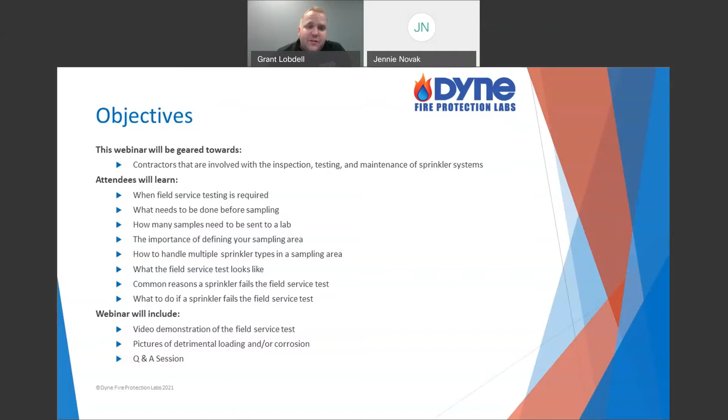As you signed up, you've seen the objectives. Really, this webinar is going to be geared toward contractors that are involved in the ITM, the inspection, testing, and maintenance of sprinkler systems. Specifically today, we're going to be talking about the field service test. Kind of when is it due, how many do I need to send in, what am I testing, what does the testing look like, what do I get back. So kind of a broad overview of the whole field service test. As Jennie mentioned, there'll certainly be a Q&A, you can type those in at any time. I won't stop my presentation to answer those until the very end, but feel free at any point to put them in there. There'll also be some videos and some pictures for you guys to look at.

Before I get going, I will be referring to NFPA 25, and I'm going to refer to my 2020 edition. That is the current one right now. I realize many states are behind, depends which state you're at, which one is adopted currently. But whenever I talk about NFPA 25, I am going to be referring to the current 2020 edition. The next edition is actually in draft 2 currently, so they are already well underway on the second draft of the next edition.

There'll be a few times I'll comment on, hey, this might be coming up in the next edition as well. But before I get going, I always do this disclaimer: this webinar shall not be considered the official position of NFPA or any of its committees, and shall not be considered to be nor relied upon as a formal interpretation. So this is my opinion of it. If you would like a formal interpretation, you can certainly go to nfpa.org and request one.

So now that we got that out of the way, let's jump right in. Starting off with a pretty obvious statement that sprinkler performance will degrade over time.

We're taking a metal object or a device and putting it out in the elements. It's going to degrade over time. How fast it degrades depends on a couple factors, and I've highlighted here the environment. If I'm in an environment with high moisture content, or harsh chemical vapors, cleaning agents, things like that, something that'll accelerate the corrosion, it's going to degrade quicker.

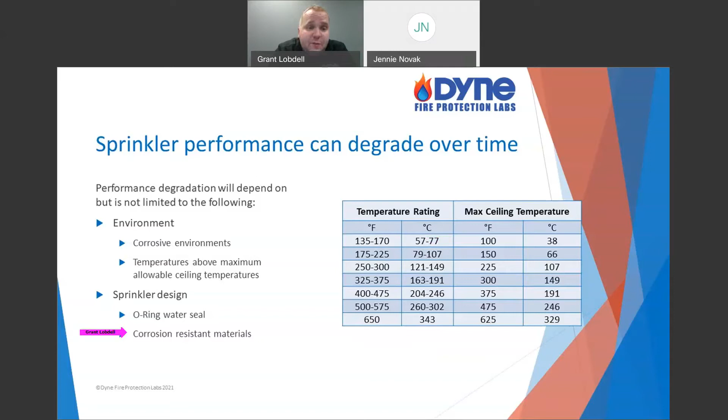But we can go the opposite direction as well. Let's say I am in a harsh corrosive environment and my sprinkler is going to degrade quicker. There are designs, there are corrosion-resistant materials and coatings you can purchase on your sprinkler to increase its lifespan in such environments. So we can go either direction on this.

So it's pretty obvious, sprinklers at some point are going to need to be replaced. Again, we're taking a metal object, putting it out in the elements. No matter what, we got a car, we got a high-rise building, at some point it's going to fail, at some point it's going to degrade. So NFPA has outlined in NFPA 25 when that replacement is to occur.

Really it breaks down, what I like to think of it as, is we're first going to identify, well, is my environment considered harsh or not? And I get a lot of questions all the time about, well, what is a harsh environment?

In the annex, the explanatory material, not in the actual enforceable code itself, but in the explanatory material, they list several environments. We have paper mills, packing houses, tanneries, alkali plants. They list several examples, but that's not all inclusive. I mean, anywhere where I could have corrosive vapors could be a problem.

We've had this argument at the committee meetings before. Water's corrosive, I mean, water vapors, that's corrosive. I think ultimately what it comes down to is if I'm outside, my typical, what I could expect for humidity, Minnesota here right now in the cold winter, we don't have that humid, but in the summers we can get up there. Once we start exceeding, if we're talking like an environment where maybe I got a swimming pool or something like that, that's probably a corrosive environment.

But how you can be sure is you contact the manufacturer of the sprinkler. Tell them what you got, here's what I got. They're going to look at the material it's made of, and they should be able to tell you, hey, do I think I have a corrosive environment or not?

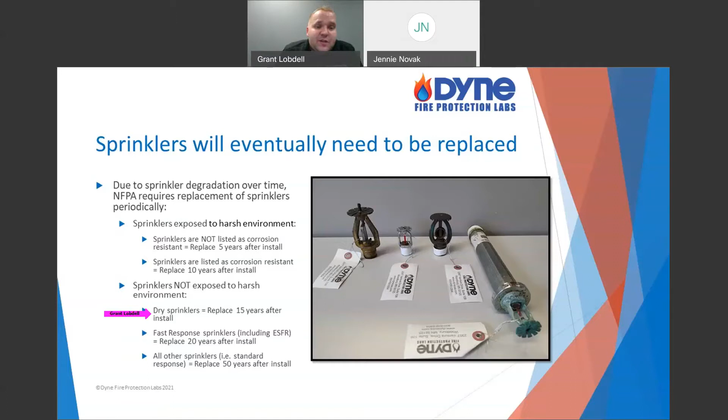So I've talked a lot about replacement, and many of you are probably thinking, boy, that's going to get costly—and that's what NFPA is thinking too. We've got to replace these all the time. Well, for good news, in lieu of replacement, you can test instead.

And this is what many people choose to do. It can help keep potential replacement costs low, and what we're going to do is confirm that this sprinkler is still maintaining its performance and hasn't degraded to an unacceptable level, and can remain in service. But realize we're going to have subsequent testing after that.

So come 50 years, let's say the picture shown is a standard response sprinkler. 50 years, it comes time to replace, you're like, you know what, I'm going to test instead of replace. Testing shows, yep, this sprinkler is still performing just fine, can remain in service. But it doesn't mean you get to go another 50 years.

If you test it, in this case it could be 10 years. If I have a harsh environment, it's going to be every 5 years. Then I'm going to keep testing it every 10 or every 5 years to make sure it continues to maintain. At some point, it's going to fail, and that's when it would trigger, okay, now I need to replace them all.

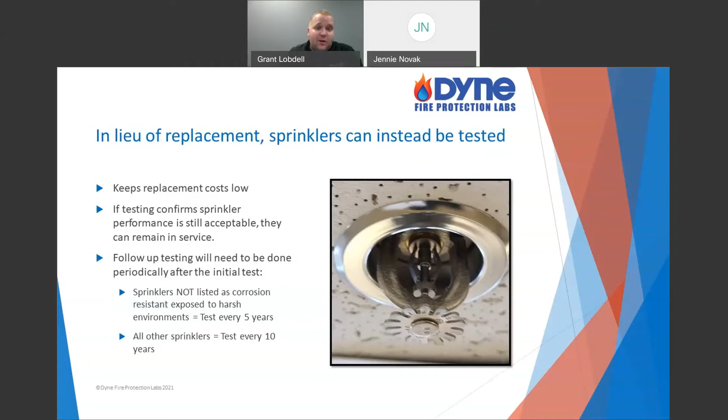So when it comes time for sampling for testing, and this is a misconception we run into a few times, we're not testing every sprinkler in your building, your area, your floor, whatever it is. As soon as you remove that sprinkler from service, you're not allowed to put it back in service. Once you unscrew it, you can't put it back up.

Two, the testing I do is destructive. So when I go and test this and ensure, yep, it released at this time, I can't reassemble it. The solder is melted, the glass is broken, whatever we got going on, it's a destructive test.

So what you're actually sampling when it comes time to testing is just 4 or 1%, whichever is greater. So in a building like this, I have less than probably 100 sprinklers. I'm going to have to send in 4. 1% is only 1 out of 100, so 4 is my minimum. But realize I've been saying at least 4 or minimum of 4 or 1%, whichever is greater.

You may have to send more. We want to make sure every sprinkler in my area is represented. If my building, when it was built, we put in the same sprinkler throughout the warehouse, everywhere, it's the exact same sprinkler, okay, 4 or 1%, choose them randomly, send them in for testing.

But let's say maybe I did an addition at some point, and I have a different sprinkler there, or maybe a different temperature rating, maybe in my laboratory a different manufacturer or temperature rating, things of that nature. I'm going to want to make sure I at least get one of those in there to represent it.

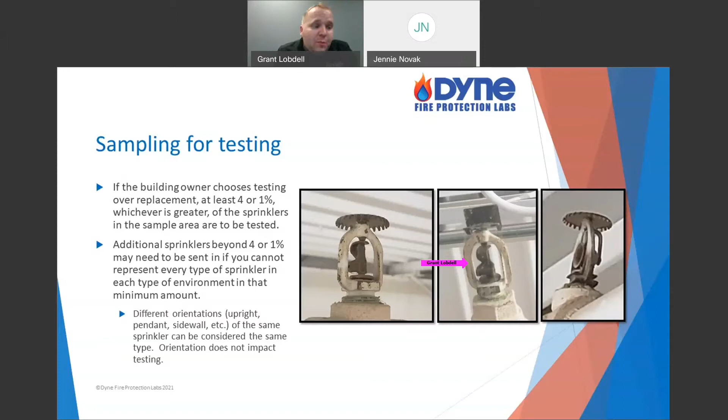So I'm going to send in 4 or 1%, could be more. I want to make sure I get everything represented in my sample. And 4 or 1% of what? Am I doing that by system, by riser, by floor, by building, by room? NFPA 25 does not tell you what your sample area needs to be, and this is on purpose.

They want the building owner or the designated representative, if you're a contractor out there listening, yourself, to define this. What is your sample area going to be? Again, just referencing the building I'm in here, I have an office and a warehouse, maybe 100 sprinklers. I certainly can say, yep, I'm going to consider this all one big sample area. I'll take 2 for my office area, maybe 2 for my warehouse, and that's going to be my 4 or 1%, assuming I only have a couple different types of sprinklers in my area.

Or I could consider the office one sample area by itself, send 4 from here, and take my warehouse and send 4 from there. Now, why would you do that? Well, the reason you want to break up these sample areas at times is you can have one failure, even just one, and you're expected to replace every sprinkler that that sample area represents.

So again, take my warehouse. Let's say it's more likely to fail, just being a warehouse, not as conditioned as the office. If I sampled my whole building here at Dyne and sent in 4, and it represented, I took 2 from the warehouse, 2 from my office, sent them in. I had one failure out in the warehouse. Now I have to replace everything at Dyne, because I consider that my one sample.

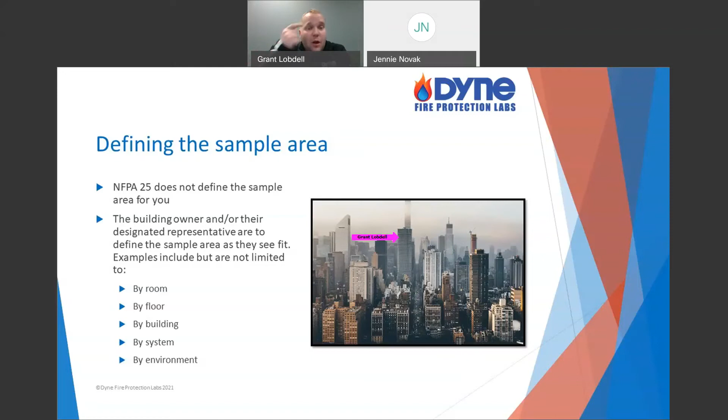Okay, well, I have to send in 4 from every floor. That's a lot to send in for testing. Well, is it worth it? You got to see how many are on the floor. How many would I have to send in versus how many would I potentially have to replace?

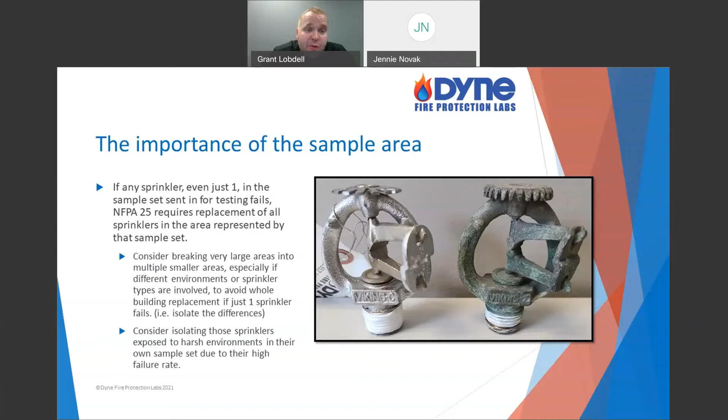So like I said, NFPA 25 does not define the sample area for you. I'm not here to tell you, yeah, you should do it by system, you should do it by floor. That is up to the building owner, or if you are their designated representative, up to yourself in that regard. So definitely it's very important that you define it. However you define it is up to you, but it does need to be defined.

So when it comes time, let's say the building owner or the contractor, the designated representative, has decided, okay, I got a lot of sprinklers here, I don't want to replace every single one, that cost is a lot, I'd rather just send in 4 or 1%. That seems more reasonable. And they've decided, yeah, I'm probably going to break out my warehouse and break out my office into 2 sample areas. Okay, they've gotten that far.

But now comes time to actually take down samples to test. You've realized, okay, I got 2 different types, I want to get 2 of each of those. Now, where do I take them? It should be random, all right? It shouldn't be just because, well, I don't have the ones by the front door, I don't have to go in very far, I can get a ladder easily in there, I'll just take those ones. It really shouldn't be. It should be at random.

Obviously, if you have different environments, like I said, you want to make sure you get those representative. So if you took Dyne and I represented it all as one area, including the warehouse, I can't just take 4 from the office and call it good. If my warehouse is a different environment and it's in my sample, I should get at least 1 in there in that sample. All right, so we want to make sure everything's representative. So again, we're choosing them at random.

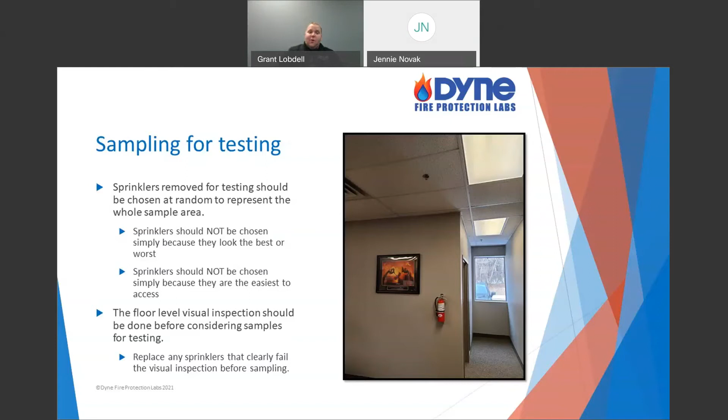And we should do this before we're testing. So I'm going to come in, okay, they want me to test, we've decided this is my area, I'm going to test. Before I actually take down those sprinklers, I'm going to do that annual floor level inspection that I do. I'm going to do that before I consider anything for testing. So I'm going to replace anything that has leakage, corrosion detrimental to performance, physical damage, loss of fluid in the glass bulb, loading that's detrimental, or paint other than that applied by the manufacturer.

I'm going to go through pictures of each of these and why it's important. But I'm going to go through and replace any of those, and what's left, that's what I'm going to sample from.

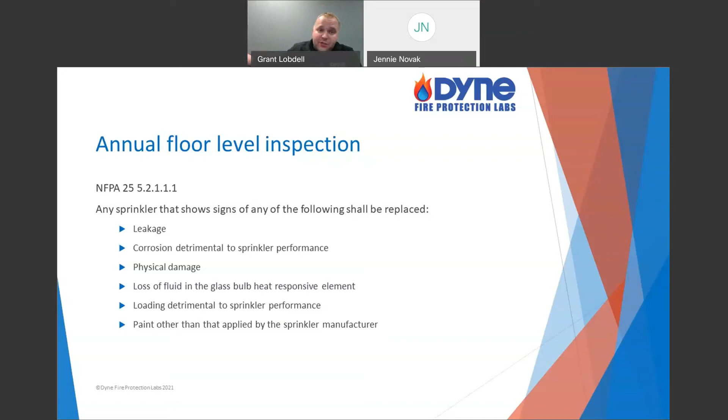So let's go into a little bit of this floor level inspection and what I should replace. I shouldn't even consider these for testing.

So leakage, that was one of them. We're going to have water damage with leakage. If you're unfortunate enough to come to a puddle or water streaming out, obviously that's leakage. But a lot of times, leakage will just be represented by corrosion around the water seal. This would be, you know, this upright sprinkler here. You can see a lot of corrosion around that water seal area. So what's happening there is water is just slowly leaking out and probably evaporating before there's a puddle on the floor before you even notice.

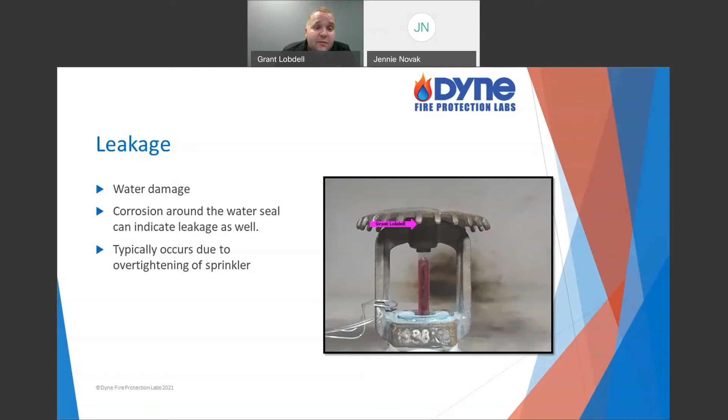But that water getting on there, I have a high moisture content, I have oxygen in the air, and I have metal, so I'm getting corrosion. A lot of times we'll see issues like this. If it was a pendant sprinkler, a lot of times I might also see if there is some water seeping down, some corrosion building up around the deflector there. So if I have very isolated corrosion like this, it could be an instance where I have leakage.

Again, why does it leak around there? A lot of people are quick to say the manufacturer didn't seal it correctly. From my experience, that's pretty rare. Typically when these leak, it's usually just over-tightening. A lot of these sprinklers, when you get a data sheet for them, they should have a torque rating on them, and that's as much torque as you should put on it. I'll have a damage picture for you later showing what happens when we over-torque them.

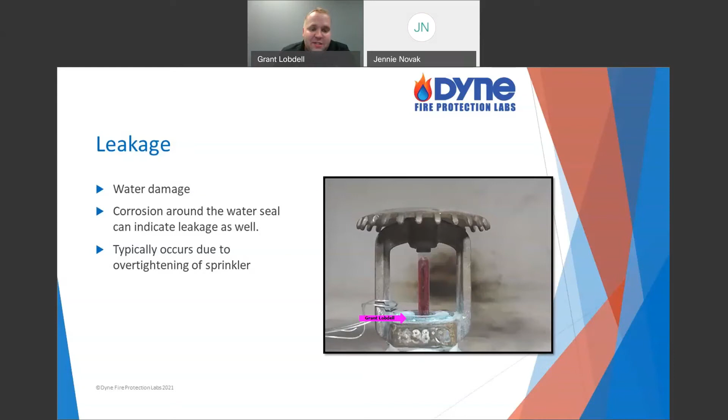So leakage, I see anything with leakage, I'm not even going to consider that for testing. Given this corrosion here, it would probably fail. But that clearly fails the visual inspection, I'd replace it.

So both corrosion and loading, two other things you're looking for in your visual inspection, they use the term detrimental to performance. We're allowing some corrosion and some loading, and we're only replacing when it gets to be detrimental. That can be a judgment call, and I've had a lot of questions about what is detrimental, what's not. Our website, I would refer you there, has a lot of pictures with examples: here was this sprinkler, here it had this corrosion, this was the response time, did it pass or fail?

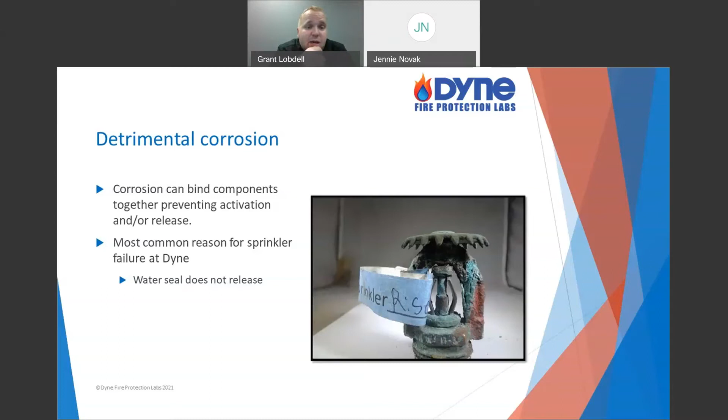We have a lot of examples out there, but even then, there is still somewhat of a judgment call. But why is corrosion detrimental, or when it's detrimental, why is it important we replace that? Well, obviously, corroded parts can weaken, or they can fuse together. That's typically what we see. The most common cause for a sprinkler failure, by far, is corrosion around that water seal, where the release mechanism may still activate, but the water seal is stuck on there. The corrosion is just holding it in place.

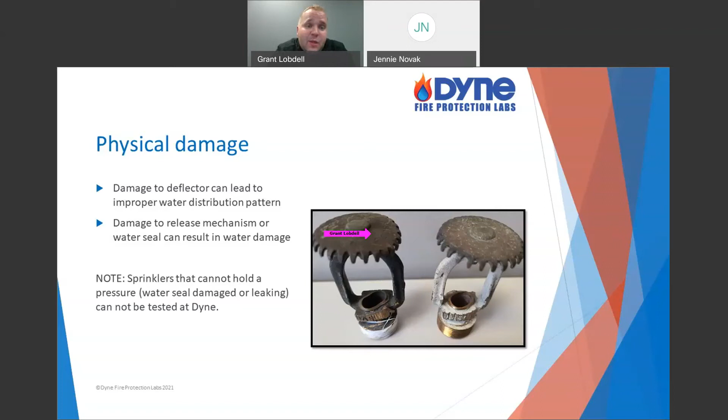It looks like there's no liquid in the bulb, but be very careful. There's instances, especially in direct sunlight if I have a lot of UV light, or if I'm in a freezer, where glass bulb sprinklers, the color, the dye inside them, can come out of solution, can change.

I can get a translucent looking bulb. Those ones in the freezer, usually if I take them out of the freezer and allow them to heat back up, the color comes back. They've shown that it's not detrimental to performance, just a loss of color, but obviously the loss of fluid is.

How can you tell? Well, a lot of these bulbs have a little air bubble, kind of like a level - you put a level on something, you've seen that air bubble move. If you can see the air bubble in it, well, you got the liquid. You could compare it to other ones as well. If that air bubble looks a lot bigger than the others, well, maybe you have lost some liquid, just not all of it yet.

The liquid - that's how a liquid bulb works. The liquid expands, pushes on the glass at a point, it breaks. So it expands into that little bubble until there's no bubble left, and then it just bursts. In this case, I don't have any liquid. Until that glass melts, that water seal is not coming out of there.

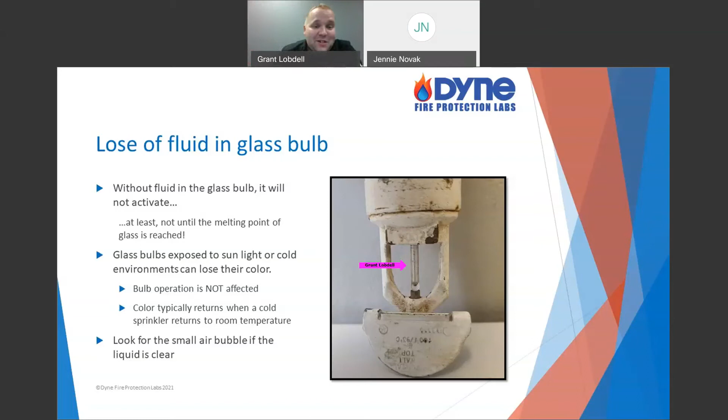The deflector is a little concerning. It looks like it's kind of built up on there. I might not get it. So do I need to replace this one? Well, you can. In lieu of replacement, you can actually use compressed air or a vacuum and clean that off, provided you don't touch any part of the sprinkler.

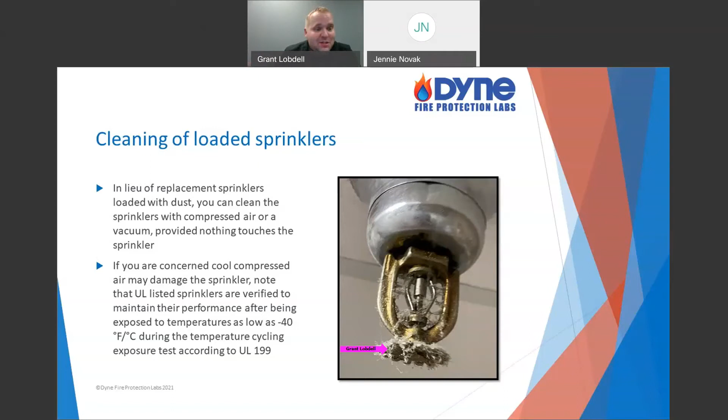So we shouldn't be too concerned about the degree of the compressed air. But still be very careful if you are choosing to go that route, that we don't damage the sprinkler. We don't want any water damage.

And non-manufacturer paint. So we're still talking about all the visual inspections, the floor level visual inspections. I'm not taking binoculars out, I'm on the floor just looking at it. Any non-manufacturer applied paint, I'm going to replace.

So we got this in the lab, we tested it, it didn't release, it fails. Now everything in the area has to be replaced. Had they seen this, maybe this is the only one that looked like this - had they just replaced it, not sent it, they wouldn't be in this situation. But we want to make sure we look for that and get them replaced.

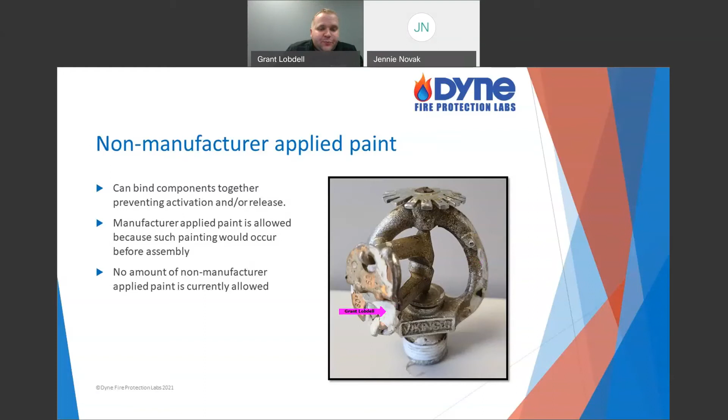So we've gone through, we've decided we are going to test instead of replace. We've gone through the math and figured out, yeah, we got a lot of sprinklers here. Testing is an option. Even though I got to test every 10 years, it's still going to cost - just testing is going to cost me a lot less than replacing everything.

I've defined my area, done my visual inspection, replaced everything that failed the visual inspection. I pulled my random 4, 1%, whichever is greater, maybe more if I have different types - I want them all represented in the area. So I got them all down, now I'm going to send them to the lab.

Worst thing you can do is just literally plop them in a box, a random box, and send them off, right? Especially if I have glass bulb sprinklers, they might rattle around, they might break. I want to make sure I get them packaged so they're not getting damaged on the way to the lab. I told you before, no matter what condition you send us in, we'll test, except for one thing - the damage. If the release mechanism is already activated, or I can't hold the pressure, the water seal got dislodged, I can't test it.

So we're going to make sure we take care to get them to the lab in good condition, or the condition you found them in, right? We don't want to be manipulating them, cleaning them, anything like that.

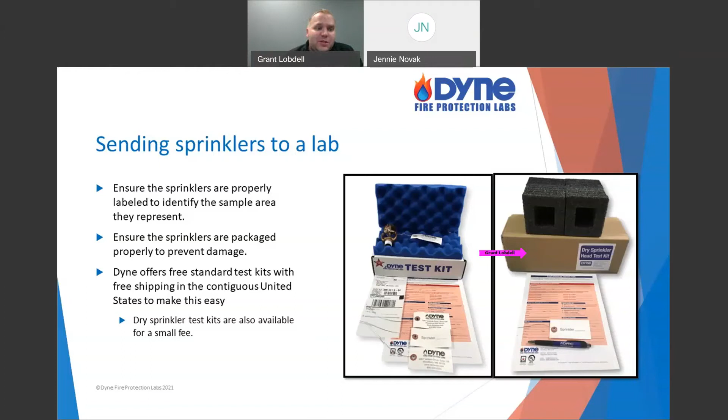We're going to take care not only to make sure they're in good condition, but also to make sure we label them really accurately. I talked about how important it is to label my sample areas, because if one fails, I have to replace it. If you just ship me a box of 20 unlabeled sprinklers, you won't know which sprinkler failed or what area it represented. So it's very important you label them—where it was from and how you're defining your sample area. That's going to be important when the AHJ asks about a failure and what it represented. You've got to make sure you know.

So we sent them off to the lab—that's about where we are in our process. Now comes time for us, for Dyne or the laboratory you choose, to do the field service test. The NFPA verbiage requires a recognized testing laboratory acceptable to the authority having jurisdiction. If you ever get pushback on whether we're acceptable, we have several documents available you can request. The big one typically is the ISO certification—we're 17025 accredited for our sprinkler test.

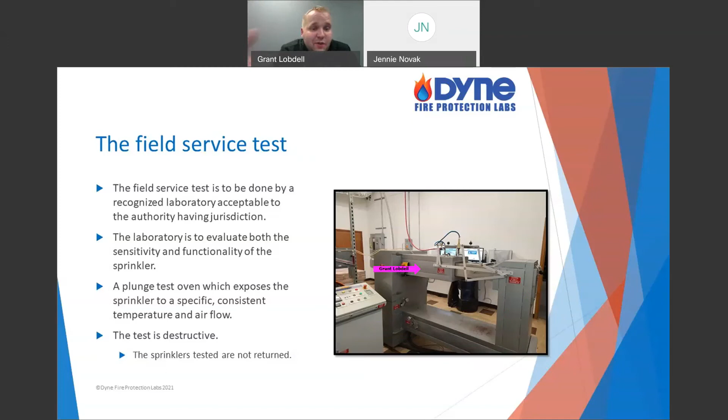We're going to use this plunge test oven to take your sprinkler and expose it to a specific temperature, airflow, and pressure. I have a video here I'll pull up and show you. It's a little dated, but it's a good demonstration of the test—same oven I showed you before here at Dyne.

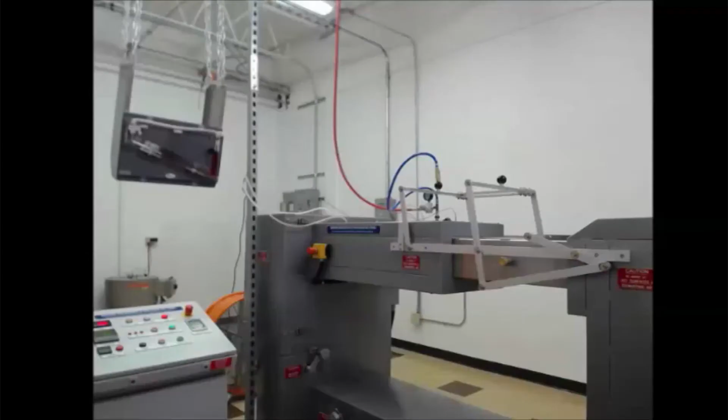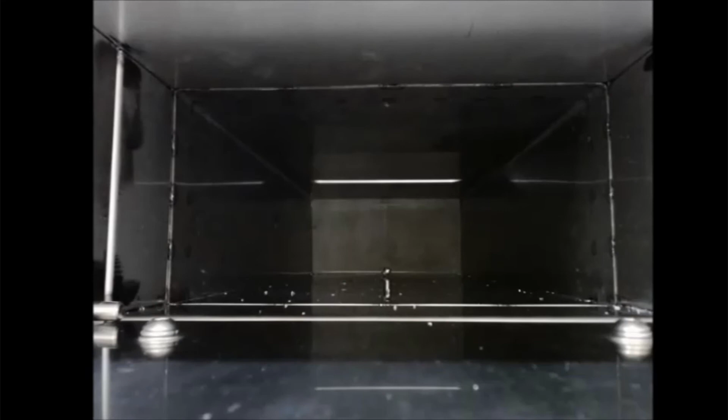This is myself, a younger and thinner me, putting a sprinkler into the oven. Right there I'm connecting air pressure to it. The sprinkler is on the test plate I assembled onto the oven, and I plunge it in. As soon as I plunge it in, a device on the back of the oven senses that the sprinkler has been plunged in and starts a timer on my instrument.

This is just a different angle of the sprinkler going into the oven. In this shot I'm looking down the oven, so the air would be coming toward you as you're watching. The sprinkler is in there, getting exposed to a specific temperature and heat, and the glass bulb explodes—the liquid expands, and it goes. You can even see the water seal fall out there. That was just slow motion.

And I think I just pull it out and show it to the camera that, yep, it fully activated and the waterway fully cleared here. So that would have been under 7 PSI of pressure, and we'll get into that in a moment.

But that's it, that's the field service test. Obviously, dry sprinklers would require a little bit on our end to get them into the oven. The barrel usually sticks out, so we have a plate to accomplish that, but it's simply assembling it to the plate, putting it under pressure, exposing it to this. This was probably 135 Celsius in this oven right now.

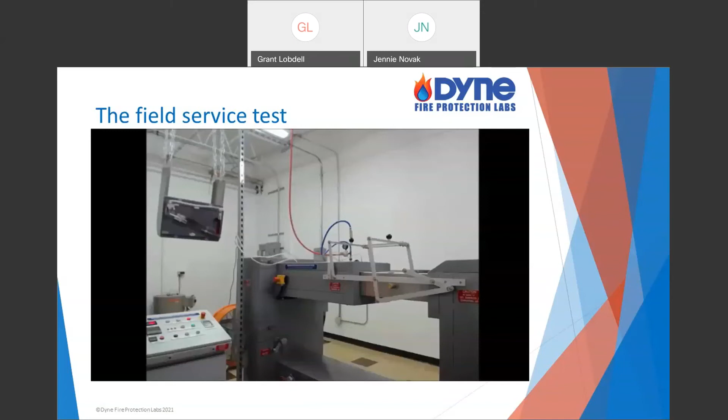Probably 2.5 meter per second airflow, and again, 7 PSI pressure. This was a quick response bulb, I believe. Yep, looks pretty thin, so it only takes a few seconds to go off. Standard can take a little bit longer, but that is what the field service test looks like here at the laboratory, and that's the instrument we use to determine it.

So when we do the field service test, what are we actually evaluating? It's the sensitivity and functionality of a sprinkler, which is kind of a loaded statement, but we'll break it down into first the sensitivity. That's the release mechanism - the glass bulb, the solder, the pellet - what exactly is the temperature doing, what's going to release the sprinkler?

Now, if I took a sprinkler and I told you it went off in 10 seconds, that doesn't tell you the whole story. Just the time by itself - how cold was it when it started? How hot of an environment did you put it in? What kind of airflow was passing by it - was it really slow or fast? There's a lot of variables when you say this one takes 10 seconds to go off. There's a lot to know.

So we typically don't talk about requirements saying this sprinkler has to go off in 10 seconds. What we'll say is this sprinkler has to have an RTI below a certain value. And I'll get into that in a moment, but what am I talking about when I talk about RTI?

So I told you response time is definitely part of it, but so is the temperature that the sprinkler is before I put it in the oven, and the temperature of the oven. Say I took a 20-degree sprinkler and plunged it into a 135-degree Celsius oven - I need to know those variables. I need to know how fast I'm flowing that air.

We take all of that stuff, all those variables, and we plug it into this equation, and that's how we get our RTI value. So what this does is it kind of levels the playing field. If a laboratory starts out with a sprinkler at 20, but another one starts at 25, that's accounted for in here - they should get the same RTI. If a laboratory plunges the sprinkler in an oven that's 135 and another at 150, well, it'll go off faster at the 150, but it should have the same RTI because that's accounted for in this. So we're putting all those variables into this and getting out an RTI.

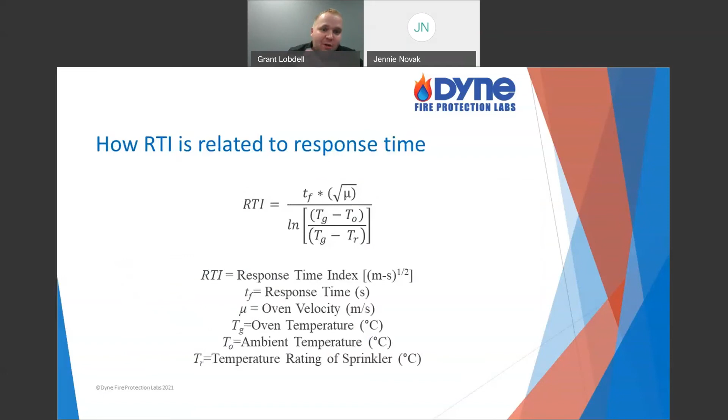And all that, again, is just - okay, we got to somehow account for all these variables, and there's this equation. You don't need to know this equation. We do the conversion for you. We tell you, okay, here was your time, and here's what it had to go off with our variables in this equation.

So those are my requirements. I do like to point out, and it is something people bring up, that my sprinkler in the field shouldn't be expected to perform the same as a brand new sprinkler, and it's not. These requirements are already allowing some degradation from the new sprinkler or the listing process. So UL 199, I'll reference them again - there are other listing standards out there, but for this example, I'll list 199.

Underwriter's Laboratory, if they're going to approve an ESFR sprinkler, they actually have to have it go off at 36 or less RTI. So we've already allowed some degradation for a field sprinkler. Same thing with fast response - 199, if it was brand new, it's expected to have one less than 50.

So when people come to me and say, well, it barely failed, can't you allow a little room for degradation, or why doesn't NFPA allow some room? They already do - it's already accounted for in there. Standard response being that it's already 350, there is no, they don't allow any more than that. That's already getting pretty high up there. To be honest, most standard response sprinklers are well below that. There's a lot of room for it to go up.

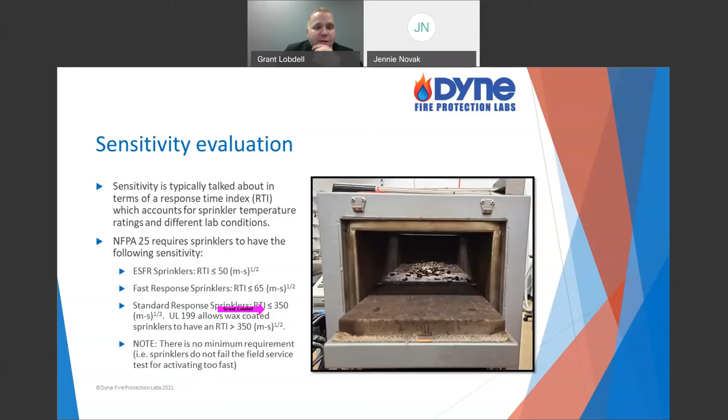So that's the sensitivity part of it - that was the release mechanism, either the bulb, the soldered mechanism, pellets. That's what we're evaluating, but that's not the whole story. The laboratory, we're also going to evaluate, as NFPA puts it, the functionality.

And then they clarify, well, that has to be - the waterway has to fully clear with 7 PSI. So keep that in mind - again, 7 is very low. Why 7? That's the minimum, I believe, any system can be used at.

When they test it, people come to me and say, well, my system at static, it's just sitting there, I don't have one sprinkler go off yet, it's well above 7 - why don't you test it at my pressure? Well, one, liability - NFPA is saying we're going to test it at the minimum anyone could ever use it, if for some reason the pressure dropped, or I have sprinklers go off and pressure drops, we're going to test it at 7.

The other argument brought up is, well, we should allow some degradation for field sprinklers. Again, we already are. Your brand new sprinkler, when it was UL listed, was tested to be 4 plus or minus 1, so anywhere from 3 to 5 PSI - they had that sprinkler go off with that low of pressure. So NFPA has already allowed a little bit of room for degradation - we've allowed up to 7.

So that is the pressure that is put on the water seal, and that's what we want to see - the water seal fully clear. If it does not, then it doesn't pass. Now, the functionality I always like to bring up - so we're evaluating the release mechanism, sensitivity, functionality, making sure that water seal fully clears off there. There's a lot to that functionality - I don't like that term necessarily because there's a lot with the sprinkler that's functionality.

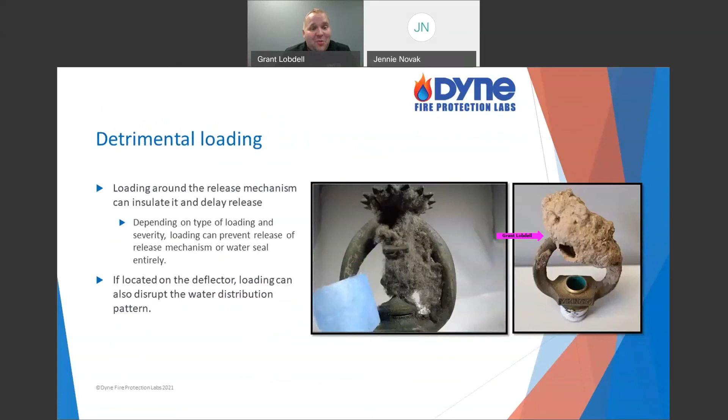Obviously, you've seen some pictures before, including pictures that look like this. Sprinklers people have sent us that clearly should have been replaced, but they didn't. They sent them in and we tested them, so that includes some of that.

So just be aware, I'm saying 3.3%, but it really depends on what your environment is. What does the sprinkler look like? Is there some corrosion building up on it, some loading, got some paint on there? But on average, that's what we're seeing, 3.3%. That's useful information if you're trying to consider whether it's worth testing your sprinklers or just replacing all of them.

Breaking it down further, this gets into the testing intervals I talked about before. So standard response sprinklers, we're going to test after 50 years or replace, test to replace. We're at 3.9% for all standard response sprinklers. For fast response, we're starting to see these after 20 years old, only 2.6%. That makes sense though, because it's only 20 years old.

These standard ones have been out there for 50 years. So this is why this 2.6 number, the NFPA is considering, okay, maybe we're getting enough data now to say maybe we can go to 25 years, maybe in the future 30. Wouldn't it be nice if it was all just 50 years for every sprinkler, just one number? We'll see, we'll have to see the failure data.

Only 1.9%. And this is why NFPA saw 1.9 and said, you know what, we can wait, we can go to 15 years with this. And if that number continues to be low, we can go to 20 years. So that's kind of why we're seeing the intervals we do.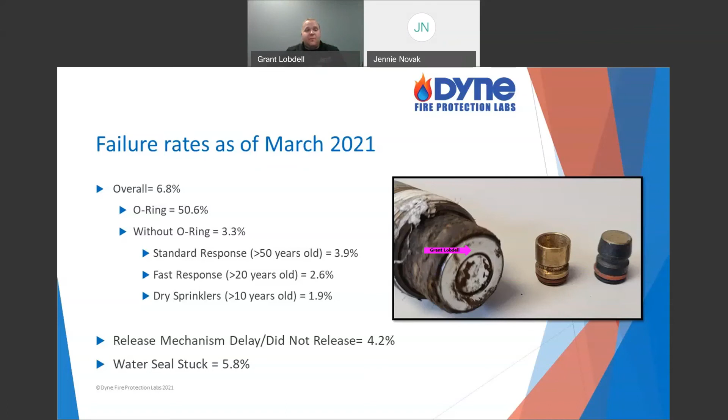You can see the cap here, this piece is butted up right against the frame, and that would be in any type of sprinkler you see. Commonly, instead of an O-ring, you either have a copper gasket, kind of a little piece between it, or you have a Belleville spring, a washer, it looks like, holding that cap away from the frame so it can't corrode together.

But that is the failure rates as of March, and that was my presentation. We'll go through some questions here. If you got them, put them in the chat or the Q&A section. Looks like we may have got some already. I'm just going to scan through them.

At the bottom, that's the question: a harsh environment, what constitutes a harsh environment? Yeah, that is a loaded question. That's a great question. Again, I mentioned it briefly before.

I'm going to look at my 2020 edition, but if you have previous editions, this was in there too. In the annex, so with all these, the enforceable code at the beginning, and then there's annex. Annex A is always explanatory material, so it's not necessarily enforceable. We're talking it's worded like should instead of shall, where the code would be shall. But you can go back there for that section where it talks about harsh environments, and there's a part that actually gives a lot of examples.

Again, we have paper mills, packing houses, tanneries, alkali plants. So when I'm reading through, a lot of these are going to have chemical vapors, something that's going to react with my metal, my material. You may not know the metal. You can look at your data sheet and try to figure it out. But I always tell people it is still a loaded question, even with these examples, and it's not all-inclusive with these. Is to contact the manufacturer.

Hey, I have this sprinkler, what's it made of? Is it going to react with my hazard? You know, if you're in that tanning plant, what chemical are you using? They're going to ask you that. And what's my vapors? So I would always default to them. You know, they know the material that was used to make it. They should know, okay, this can be considered harsh.